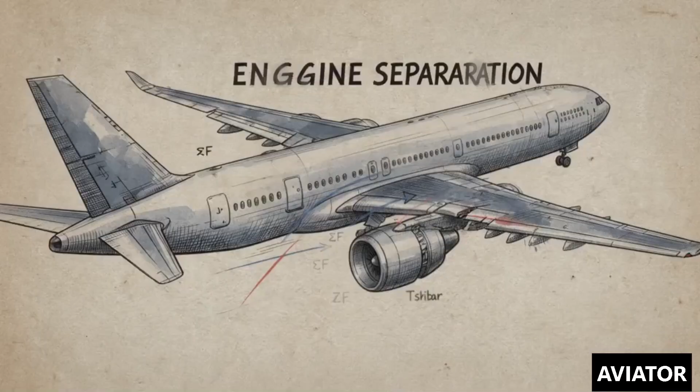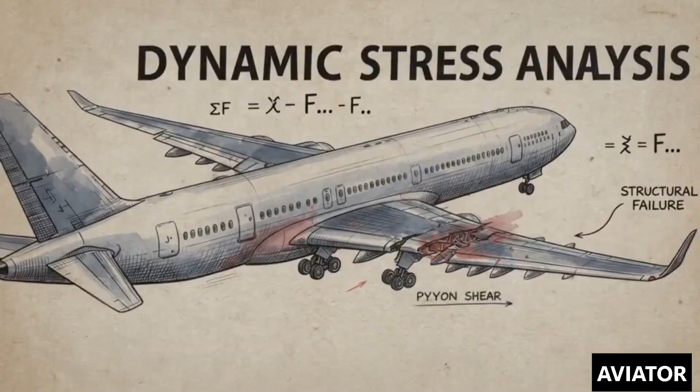At 15:02 on May 25, 1979, American Airlines Flight 191 began its takeoff roll at Chicago O'Hare. At rotation speed, the entire left engine and its pylon separated from the wing. The flight crew executed their emergency engine-out training flawlessly. 31 seconds later, all 273 people on board were dead.

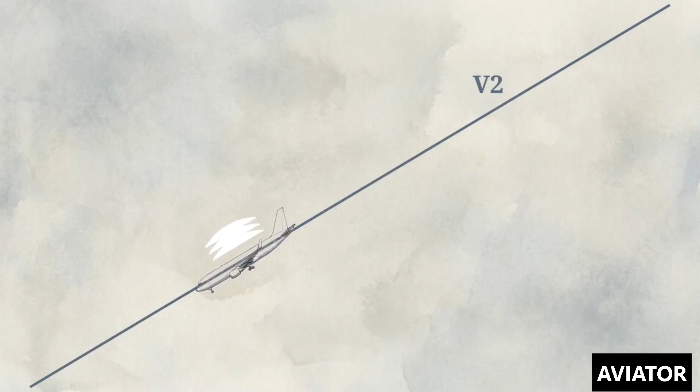The National Transportation Safety Board investigation revealed a chilling truth: the crew was entirely blameless. They adhered to standard engine-out procedures exactly as trained, and in doing so, flew the aircraft directly into an unrecoverable stall.

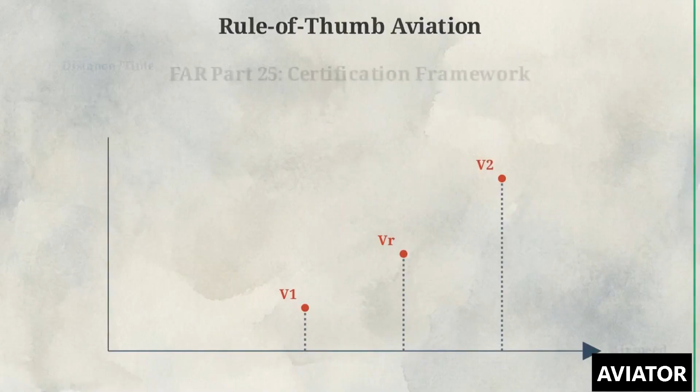Early commercial aviation relied heavily on rule-of-thumb airspeeds and pilot intuition. Modern flight is governed by FAR Part 25 certification, a rigid mathematical framework that calculates precise constraints for every second of the departure. At the center of this framework sits V1.

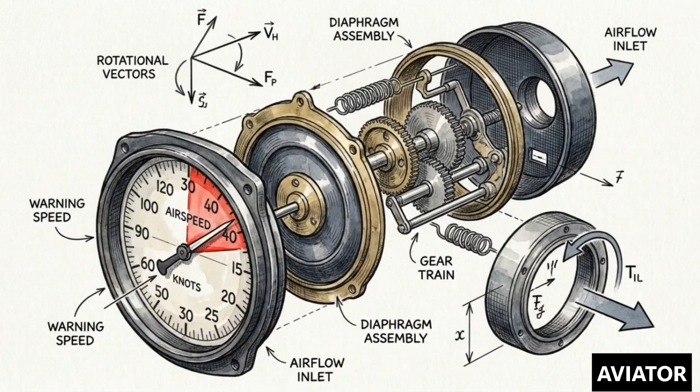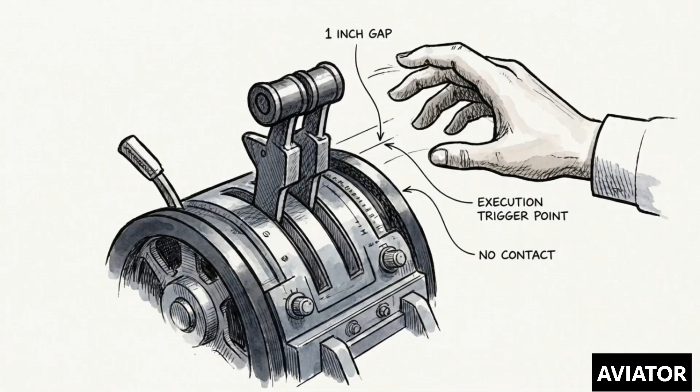It is routinely taught and referred to as the takeoff decision speed. The regulations, however, explicitly define V1 as an action speed. The actual cognitive choice to continue or abort a takeoff happens in the briefing room. By the time the V1 call-out echoes in the cockpit, all choices are locked. V1 is merely the physical execution trigger for an already made decision.

Surviving a catastrophic failure on the runway does not rely on split-second reflexes. It requires understanding the exact kinematic constraints built into the flight envelope long before the aircraft's brakes are released.

This chart plots the chronological performance envelope of a 300-ton aircraft starting its takeoff roll. The x-axis measures airspeed, and the y-axis measures distance and altitude. From brake release, the aircraft accelerates against absolute physical boundaries.

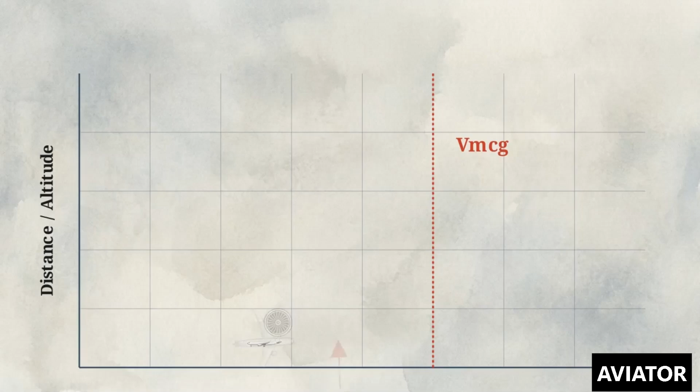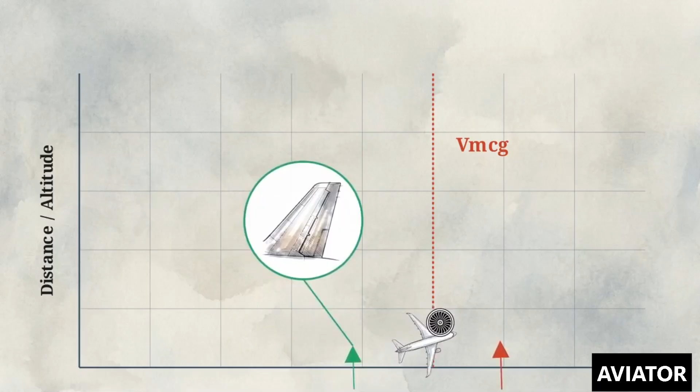The first boundary is VMCG, or minimum control ground. If an engine fails, the asymmetric thrust violently yaws the nose toward the dead engine. VMCG is the absolute aerodynamic floor, where the airspeed generates enough rudder force required to keep the aircraft on the centerline.

This value shifts with the atmosphere. At high-density altitudes, the engines produce less thrust. Less thrust means less yaw during a failure, which paradoxically lowers the VMCG threshold.

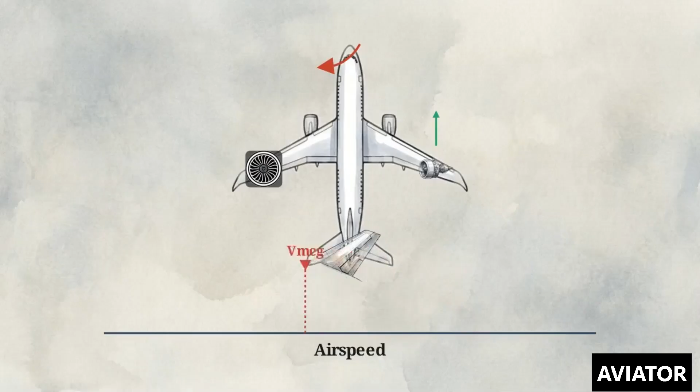Moving down the runway, we hit ASDA, the accelerate-stop distance available. This represents the absolute maximum length of pavement, including the runway and any structural stopway, available to safely abort the takeoff and brake to a halt.

Overlapping that is TODA, the takeoff distance available. This is the runway distance required to lose an engine, continue the acceleration, and safely clear a 35-foot screen height on the remaining thrust. An aircraft cannot legally or physically depart unless its designated speeds fit perfectly within the intersection of these ground constraints.

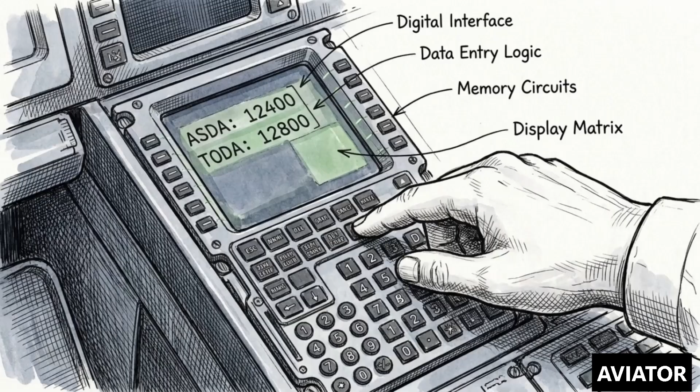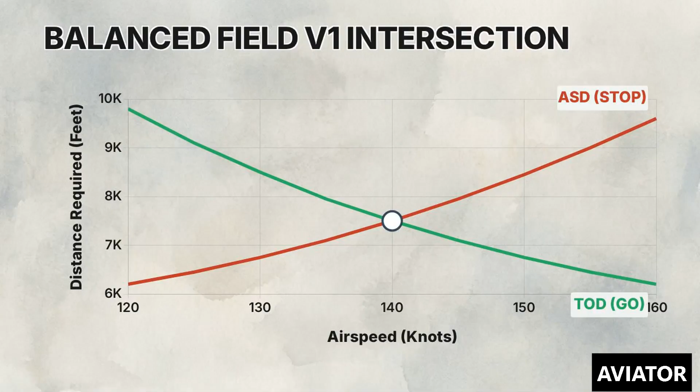When the required stopping distance perfectly equals the required continuing distance, the runway is optimized. This intersection point is the balanced field V1. It yields the maximum possible takeoff weight for that specific piece of pavement.

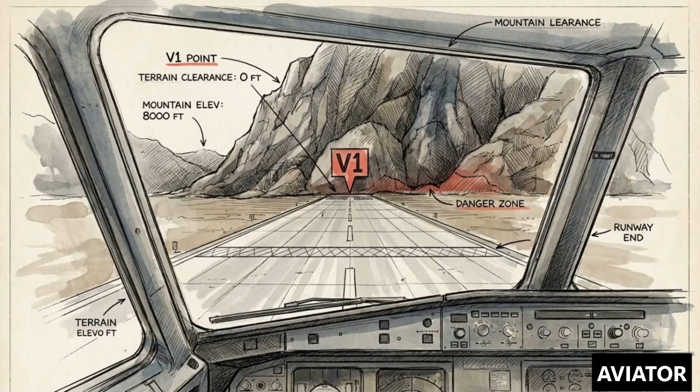Dispatchers can manipulate this point. On a wet runway, they bias V1 lower, reducing the energy required to abort. If there is a close-in mountain ahead, they bias V1 higher, forcing the aircraft to gain more speed on the ground to maximize the initial climb.

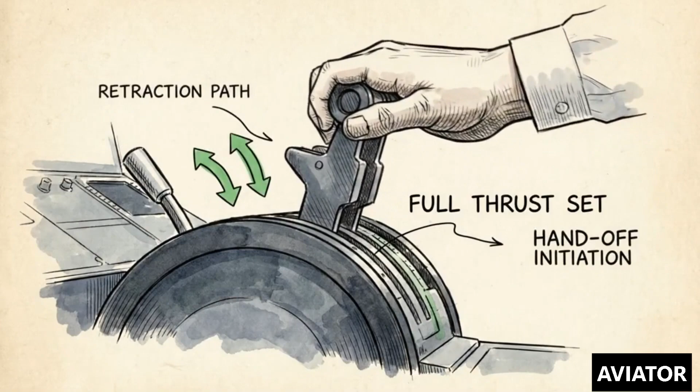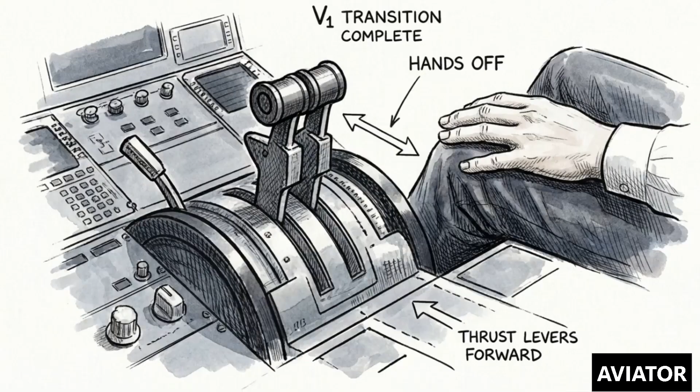To enforce this physics boundary, operators use the hands-off thrust levers rule. At the V1 callout, the flying pilot removes their hand entirely from the throttles. This physically neutralizes the human instinct to pull power back if a loud noise or vibration occurs.

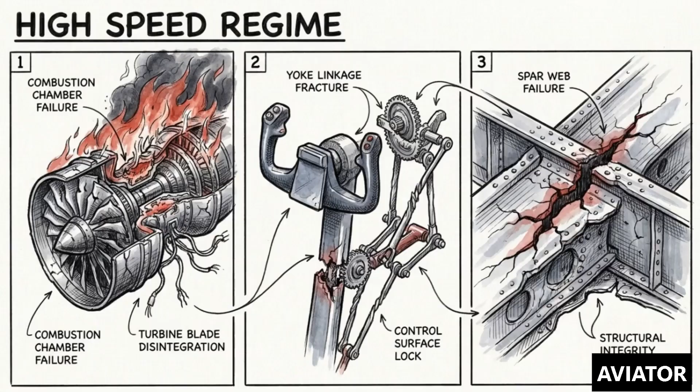Between 80 knots and V1, the criteria for a rejected takeoff narrow drastically to engine fires, flight control jams, or structural failures. The energy state here is immense, and stopping is at the very limit of the aircraft's brakes.

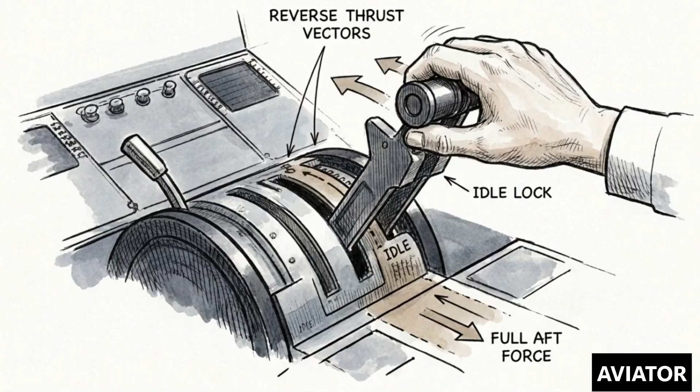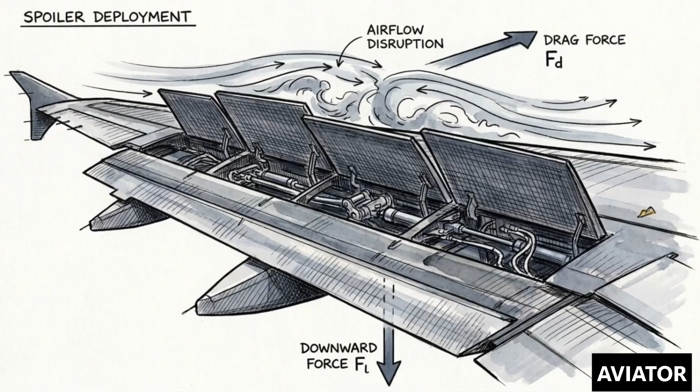A high-speed abort follows an exact mechanical sequence. Thrust levers slam to idle, followed immediately by the speed brake lever raised to full. Deploying speed brakes before engaging reverse thrust is mandatory. The ground spoilers kill lift across the wing, transferring the aircraft's multi-ton weight squarely onto the landing gear to maximize wheel friction. With the weight on the wheels, maximum manual braking and maximum reverse thrust are applied to bleed off the remaining kinetic energy.

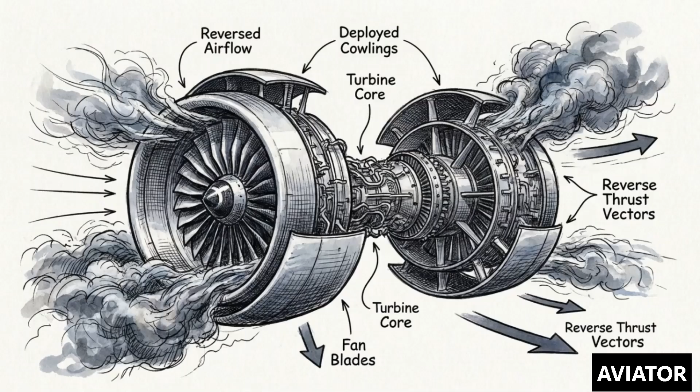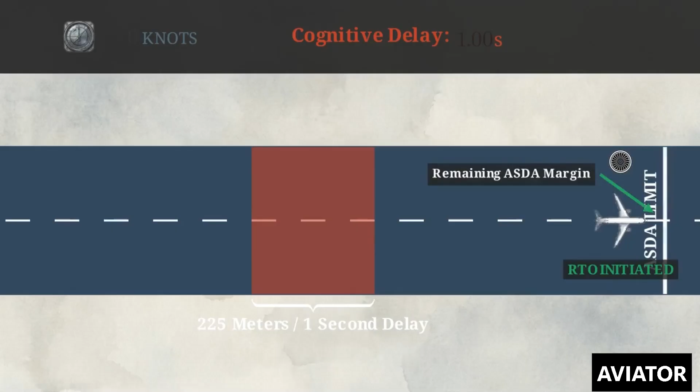Human processing time is a luxury the runway does not afford. A single second of cognitive delay at 150 knots burns through an additional 225 meters of pavement. Once the aircraft crosses V1, an abort almost guarantees a high-speed overrun.

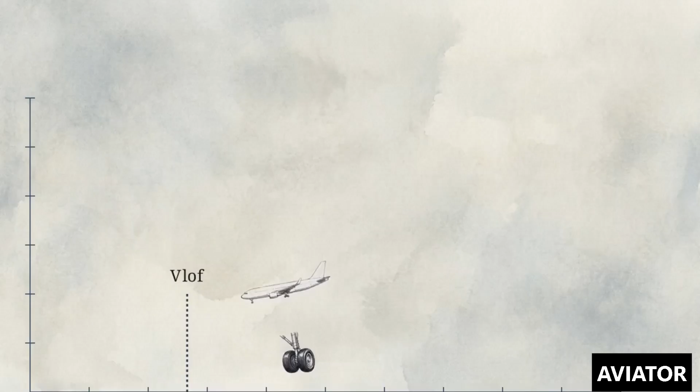Once the physics favor flight, taking a burning or damaged engine into the air is safer than attempting to stop. The moment the wheels leave the ground at VLOF, the physics change. The nose wheel steering is gone. Directional control is now entirely aerodynamic, defined by a new lower boundary, VMCA, or Minimum Control Air.

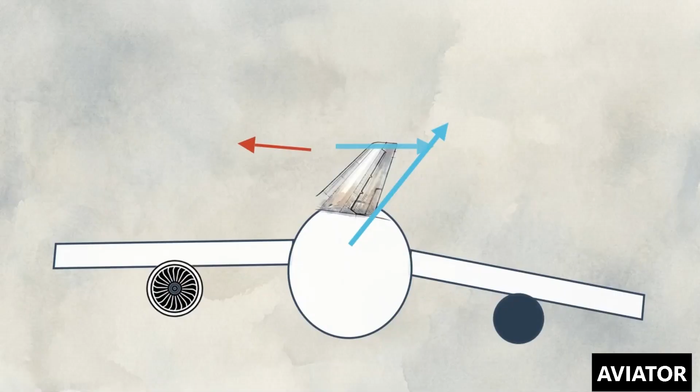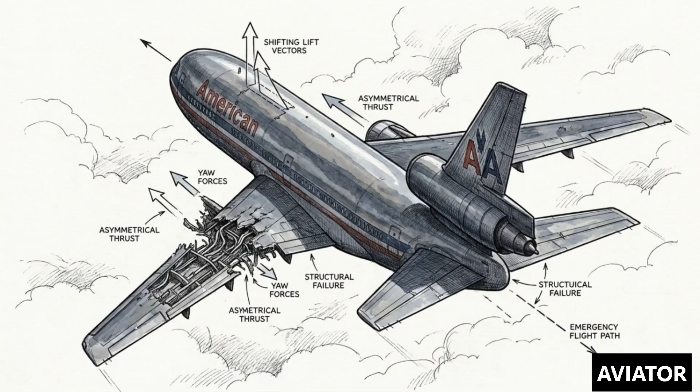To maintain VMCA, certification assumes the pilot banks exactly 5 degrees toward the live engine. This creates a lateral lift vector that fights the asymmetric yaw, significantly reducing the amount of rudder deflection required to fly straight. The crew of American Airlines 191 managed this perfectly, but the engine separation triggered a secondary mechanical failure.

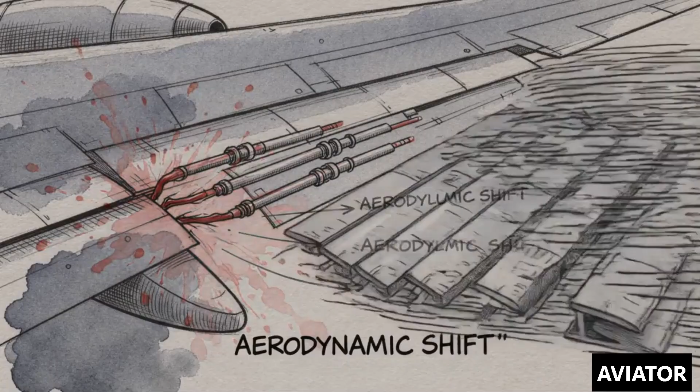As the pylon ripped away, it severed 4 hydraulic lines. Depressurized, the aerodynamic forces pushed the left wing's leading edge slats back into the retracted position. The crew had no warning lights indicating this configuration change. Retracting the slats instantly degraded the left wing's lifting capability, pushing its localized stall speed up to exactly 159 knots.

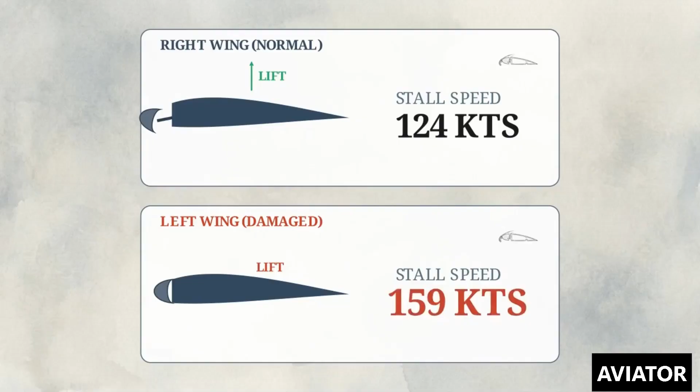The standard engine out procedure dictated that the crew pitch the nose up to bleed off airspeed until they reached V2, the optimal engine out climb speed. For their weight that day, V2 was calculated at exactly 153 knots.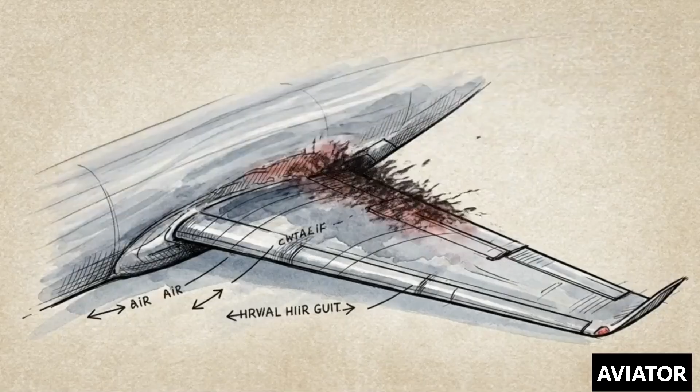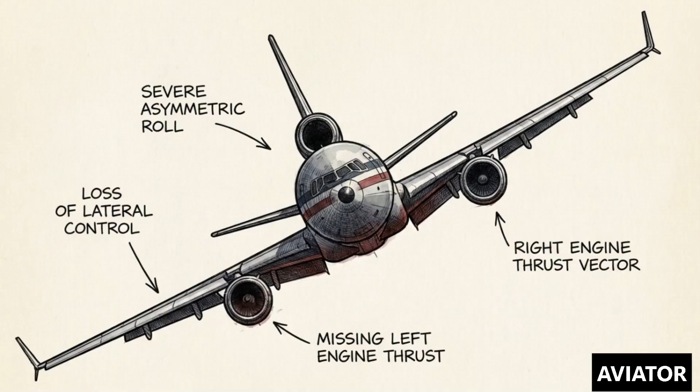As the DC-10 passed through 159 knots to meet the V2 target, the clean airflow over the left wing violently separated. The localized stall destroyed lift on the left side, while the fully slatted right wing continued to fly normally. The massive asymmetry in lift snapped the 160-ton aircraft into a sheer left roll. At just 300 feet above the ground, recovery was physically impossible.

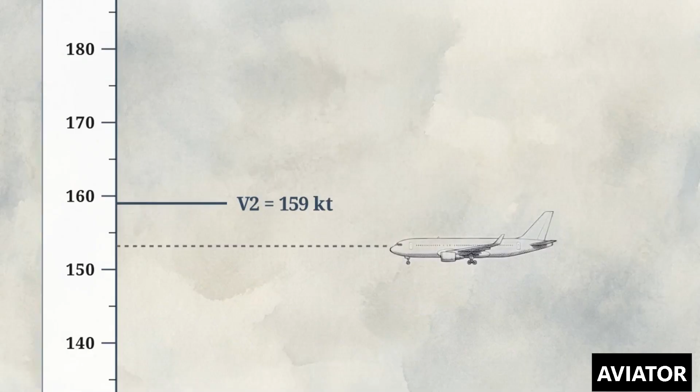Following this accident, the industry permanently rewrote the doctrine. V2 is a regulatory minimum floor, not a target. If an aircraft loses an engine above V2, the pilot maintains the speed at which the failure occurred.

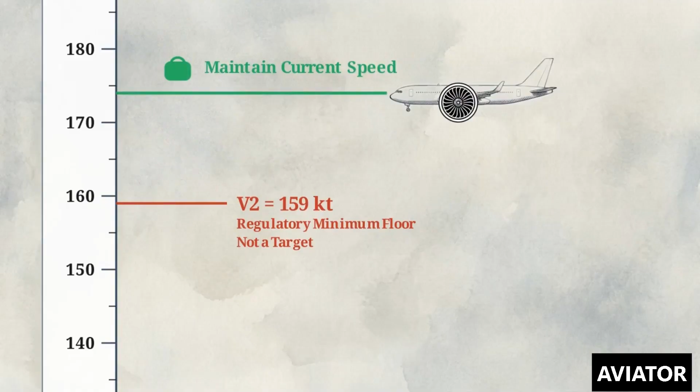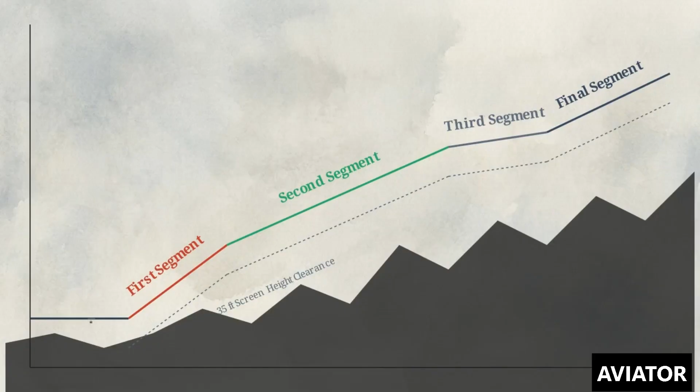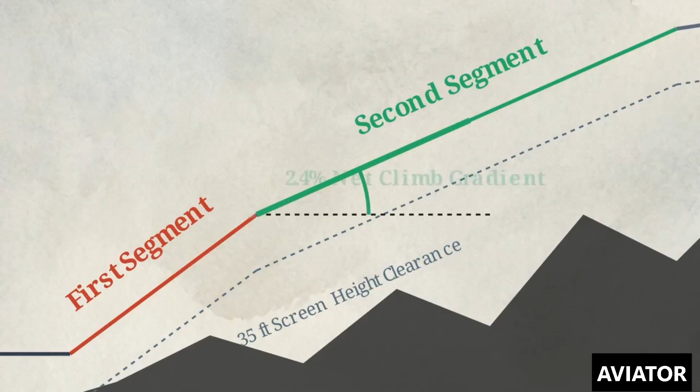Once airborne and stabilized, an aircraft operating on one engine must satisfy strict minimum climb gradients across 4 distinct performance segments to clear surrounding terrain. The most demanding of these is the second segment. Beginning the moment the landing gear is fully retracted, a twin-engine jet must maintain a net climb gradient of 2.4%. This narrow margin dictates the maximum certified takeoff weight for the entire departure.

This phase demands strict discipline regarding the acceleration altitude. Retracting the flaps below this altitude trades lift for speed too early, sacrificing obstacle clearance. Delaying the retraction extends the time the aircraft spends fighting maximum aerodynamic drag.

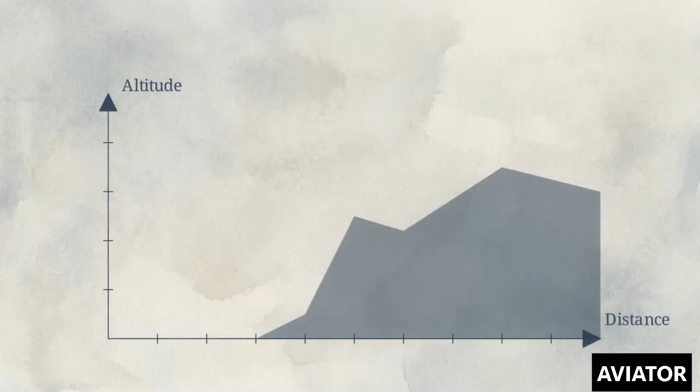A normal all-engine standard instrument departure requires a minimum climb gradient of 3.3%. A heavy aircraft operating on one engine at 2.4% will mathematically fail to clear the obstacles along that standard path.

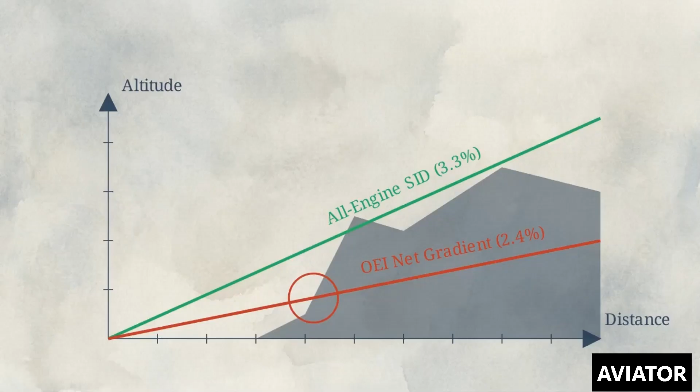This graph illustrates the solution. Airports flanked by high terrain publish an engine out SID. This is a pre-calculated lateral escape route designed to thread an impaired, low-climbing aircraft safely through valleys and around peaks.

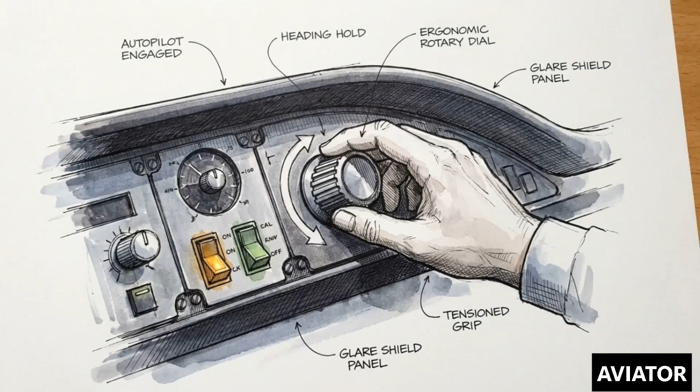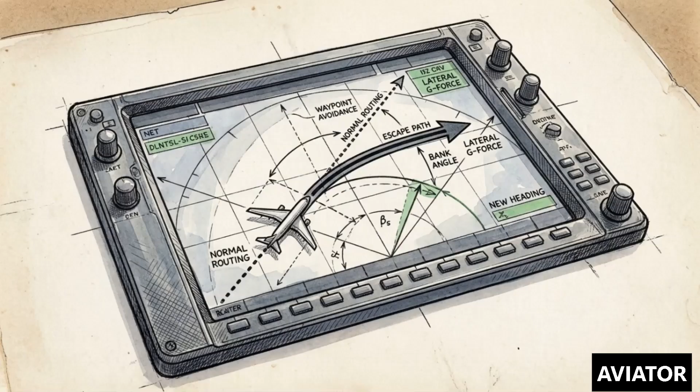If the assigned ATC vector conflicts with the engine out routing, pilots execute a standby protocol. They immediately turn onto the escape route to protect their clearance, deviating from air traffic control without asking for permission. Below 400 feet, the cockpit operates under a strict sterile rule.

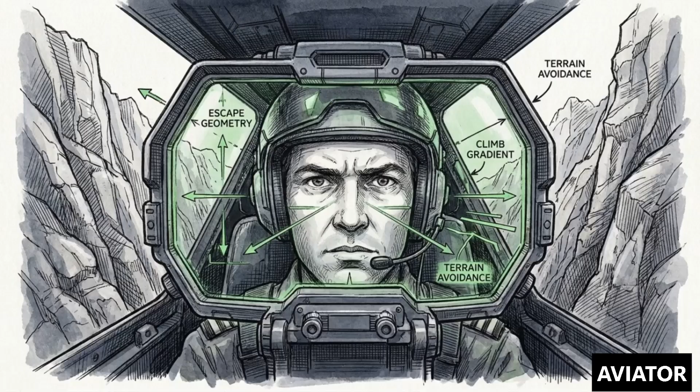There is no checklist execution, there is no troubleshooting. The crew's sole focus is maintaining directional control, holding airspeed, and retracting the gear. Surviving high terrain on a single engine requires total unflinching subordination to the pre-calculated escape geometry over any real-time directives from the ground.

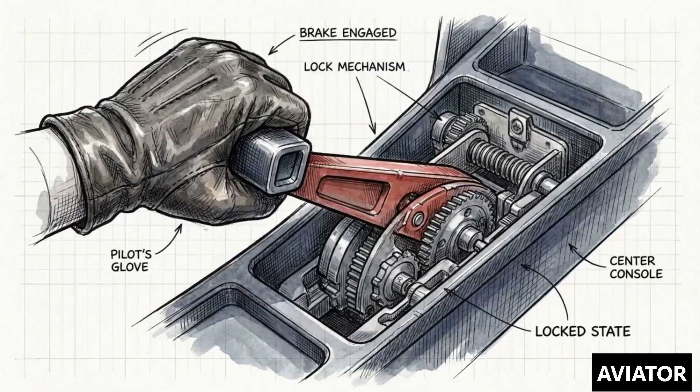Every constraint, gradient, and escape vector we just mapped out is locked into the flight management system during the briefing, 20 minutes before the parking brake is released. Today, the static, paper-based performance manuals that defined early commercial flight have been entirely replaced by electronic flight bags.

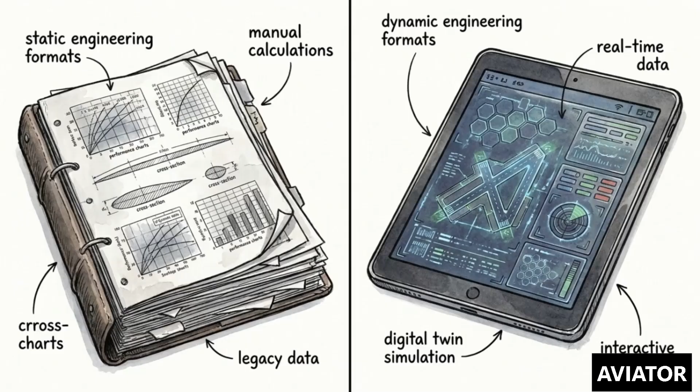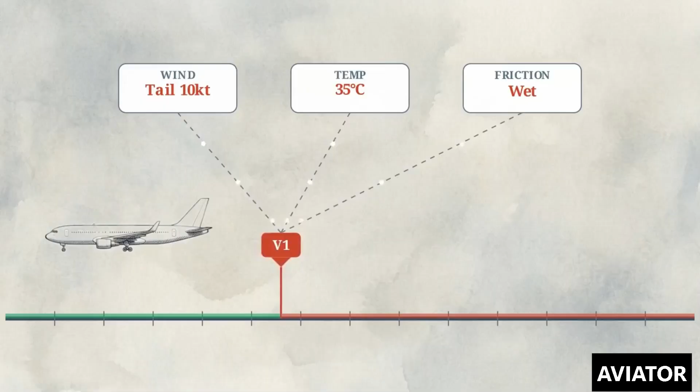Utilizing edge computing, modern systems continuously recalculate V-speeds during the taxi. They dynamically ingest minor shifts in wind, temperature, and runway surface friction, adjusting the kinematic boundaries right up to the threshold. Beyond calculating airspeeds, modern flight management is moving towards integrating structural health monitoring directly into the aircraft's performance logic.

The NTSB attributed the 1979 disaster to maintenance damage within the engine pylon, a flaw that was invisible to the crew and ignored by their performance math. Today's predictive algorithms use acoustic sensors and strain gauges to verify airframe integrity in real time, ensuring the mechanical state of the wing actually supports the V-speeds displayed on the screens.

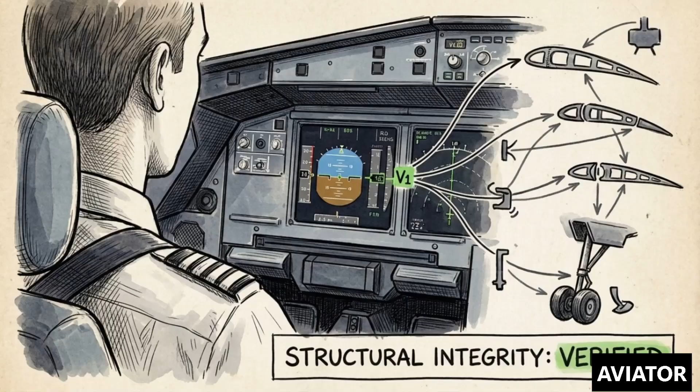The pilot who successfully navigates an engine failure at V1 is not making a brilliant, split-second decision under pressure. They are simply executing a mathematical solution that was already solved on the ground.